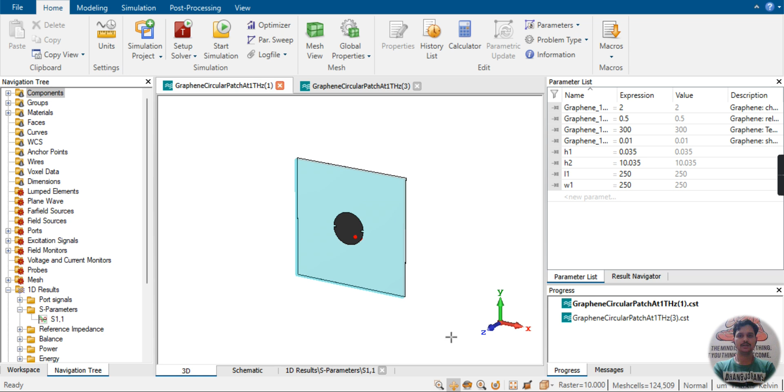Today we are going to discuss the frequency reconfigurability property of graphene terahertz antenna. As we can see on the screen, there is a circular shaped, circularly polarized graphene terahertz antenna where the substrate used is silica, the bottom is of PEC ground material, and the patch is made up of graphene.

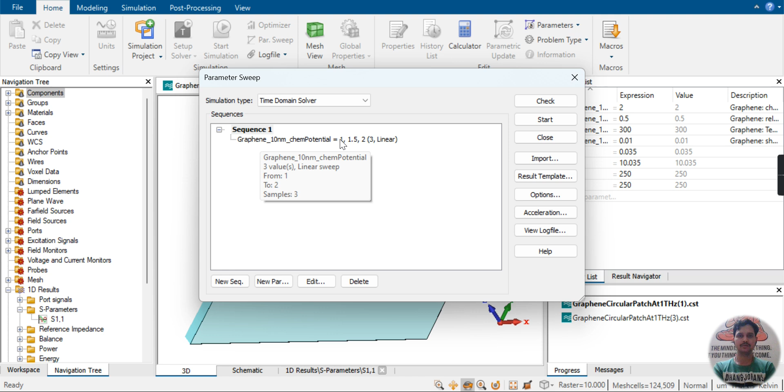Here, to achieve frequency reconfigurability, the chemical potential of graphene is varied. So we see here in the parametric sweep, we can add a new sequence, and in the sequence I have taken a parameter which is graphene chemical potential. Here I have varied the graphene chemical potential from 1 to 1.5 and then 2 electron volts. So I have simulated this task, and the results in terms of S11

are presented here. We can see that the green plot of S11 shows the chemical potential of 1 electron volt, while the red one shows 1.5 electron volt of chemical potential, and the blue plot shows 2 electron volt of chemical potential. So we see that the variation of chemical potential is shifting the S11 response towards the right side while improving the S11 characteristics. This is what we call frequency reconfigurability achieved by graphene terahertz patch antenna at terahertz frequency.

We see that at 1.5 electron volt, the S11 response is way better than at 1 electron volt. So to achieve this frequency reconfigurability, we vary the chemical potential, which indirectly varies the conductivity of graphene. So with the variation of conductivity of graphene, the change in the S11 plot is achieved.

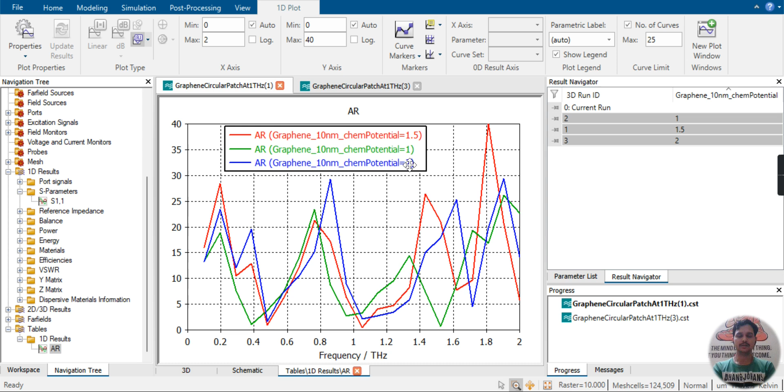Now we can see the variation of circular polarization or axial ratio with the variation of chemical potential. So here the plot is for axial ratio. We see that for each value of chemical potential, we have a different axial ratio plot. This one is for 1.5 electron volt. For 1 electron volt, the plot is like this, and for 2 electron volt, the plot is like this. So this is the verification.

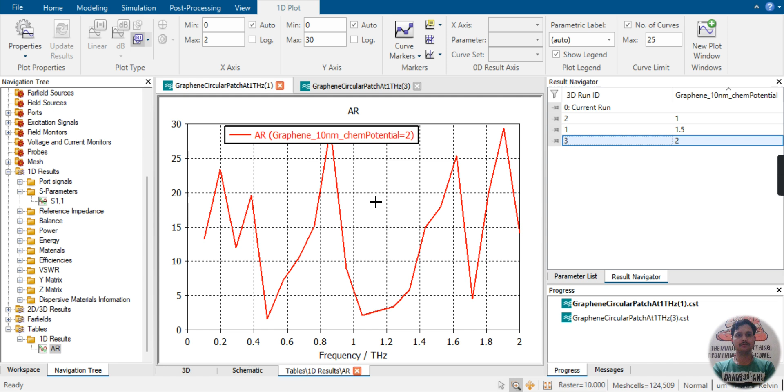This variation in the axial ratio plot and the variation in the S11 plot with respect to the chemical potential verifies that the patch made up of graphene is acting like proper graphene. Only then do we get the chemical potential variation outcome in terms of variable S11 response. Otherwise, if the prepared graphene patch is not proper, then we don't get the chemical potential variation response in terms of S11 variation.

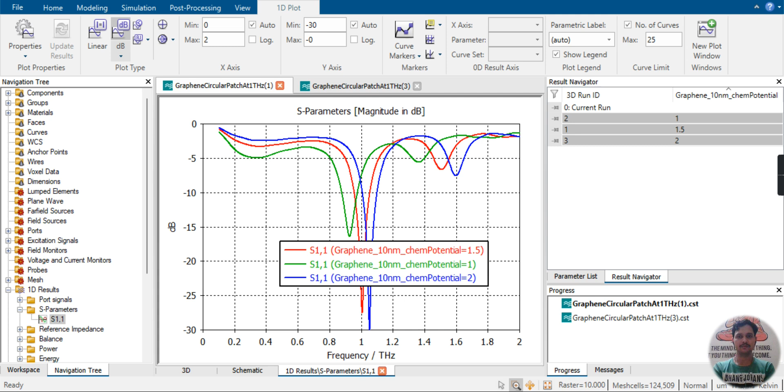Here, one thing is important: we cannot vary the chemical potential to 3 electron volt, 4 electron volt, 5 electron volt. There is a mechanism involved with this. So we can take a reference, as I have earlier expressed, the work from Sasmita Dash ma'am and Patnaik sir, performance enhancement of graphene plasmonic nanoantennas for terahertz communication. In this work, they have shown a relation.

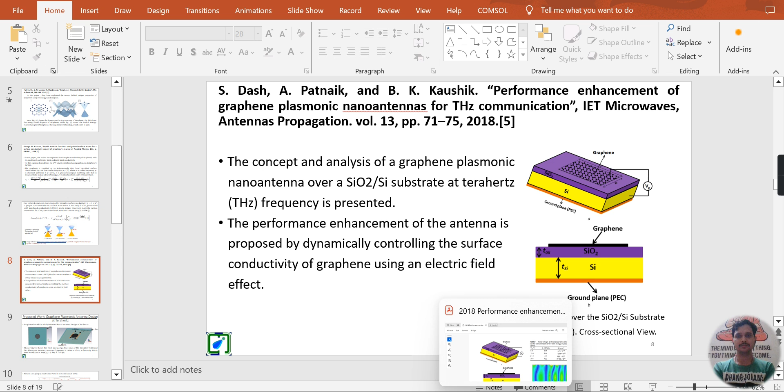We see that a very high value of gate voltage is required to achieve just 0.6 electron volt of chemical potential. So to apply 2 electron volt or 4 electron volt of chemical potential, we may require 100 or 150 volts of gate voltage. So for smaller micrometer size structures of graphene antennas, applying a gate voltage of hundreds of volts may damage the structure. So it is always advisable to use smaller values of gate voltage, and hence smaller values of chemical potential, to tune the graphene terahertz plasmonic antenna.

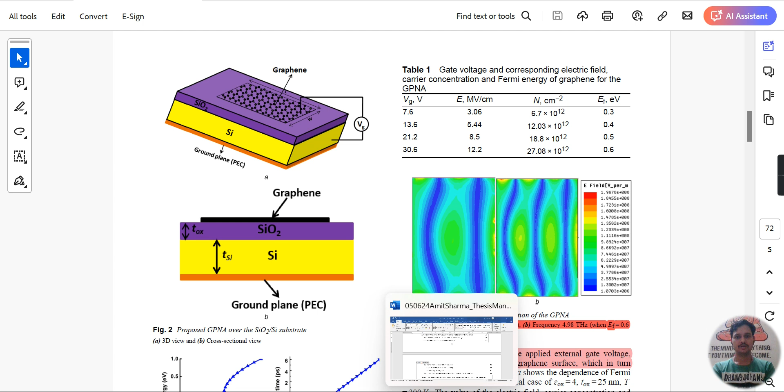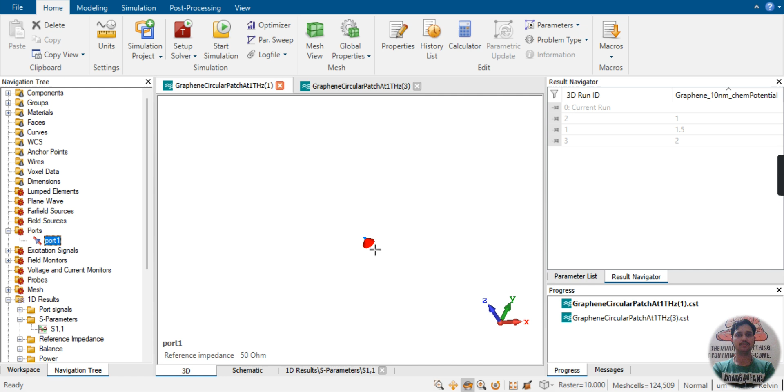The other thing about the graphene antenna is its feeding. We can see here I have used a discrete port to feed this structure. When we go to ports here, it is visible. You can see that a discrete port from ground to patch of the antenna is connecting and supplying the patch.

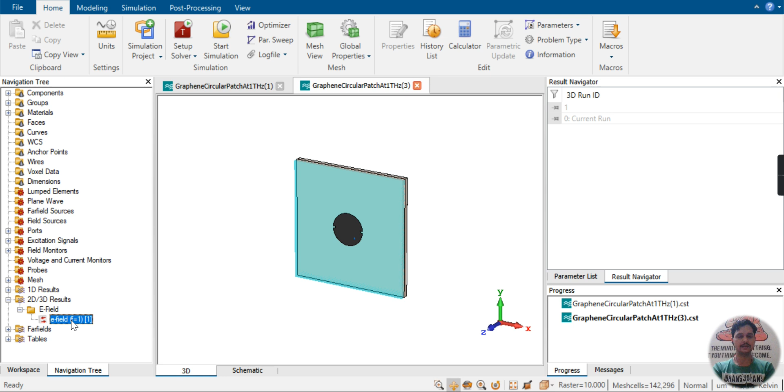So this is how we are getting the excitation and the response for the two layer 2D structure specifically. You can see here in terms of electric field distribution that the antenna is getting properly excited. So this is how antenna testing for graphene terahertz antennas is done.

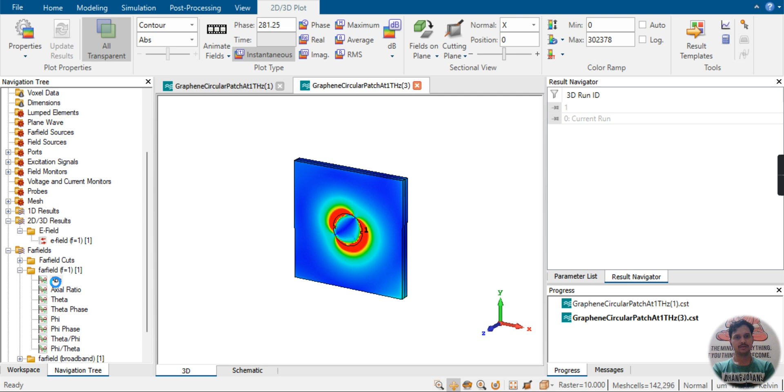The gain of this antenna at 1 terahertz is quite significant, 3.36 dBi, with 70% radiation efficiency and 50% total efficiency. Graphene terahertz antennas are known for not providing sufficient efficiencies. As we can see here, the total efficiency is around 50%. So a lot of research is going on to improve the performance in terms of efficiency of graphene terahertz antennas.